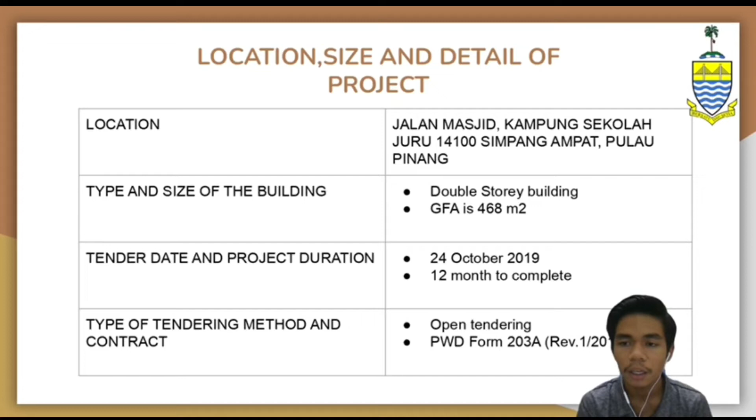For the case study, the client for this building is the Government of Penang, known as Kerajaan Negeri Pulau Pinang, the government authority for Pulau Pinang. The state government follows and is established by the Constitution of Malaysia, the Constitution of the State of Penang, and the Supreme Law of Malaysia. The government of Penang headquarters is in Georgetown, the state capital.

Their principle is to be ready and willing to help a friend in need regardless of religion, race, position, behavior, and physical condition. The government of Penang's responsibility is to build, develop, and maintain the state towards the desired direction that benefits its end users. The end users of the building are the students, teachers, management, and other workers of Kelas Kafa Masjid Kampung Sekolah Juru. The purpose for its end users, especially students, is to learn about Islamic knowledge, which was given priority by the government of Penang in elevating Islam as the official religion of our country.

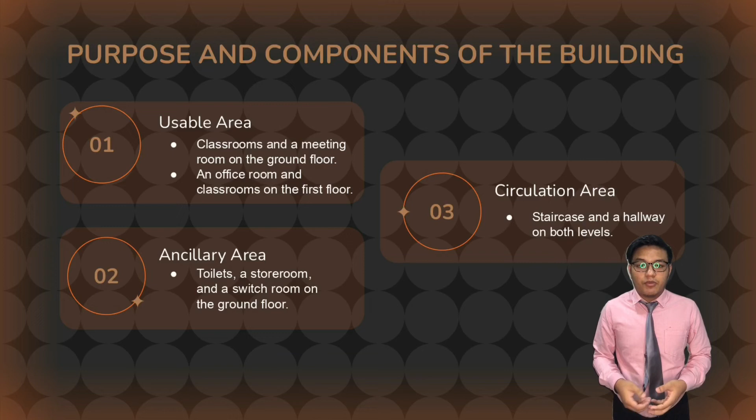For example, for usable area, this includes a classroom and a meeting room on the ground floor. Aside from that, usable area on the first floor consists of an office room and classrooms. For ancillary area, they only have toilets, a storeroom, and a switch room located on the ground floor of this school building. Meanwhile, the circulation area in this project only has a staircase and a hallway on both levels.

Next, I will explain about work breakdown structure, WBS. The purpose of WBS in construction management is to help the project manager run the construction activities as per the construction estimate. The WBS objective is to reduce the size and complexity of the huge project. By breaking it down into smaller pieces, work may be completed concurrently by several team members, improving team productivity and simplifying project administration.

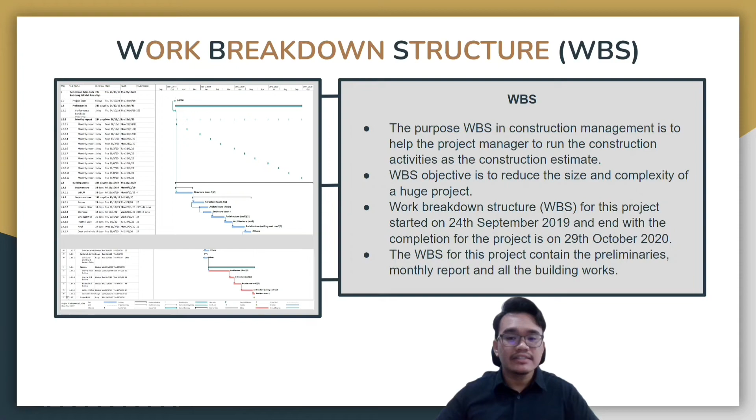The work breakdown structure for this project started on 24th September 2019 and ends with the completion of the project on 29th October 2020. The WBS for this project contains the preliminaries, monthly report, and all the building works. The preliminaries also include the performance bond and insurance for the whole project duration. For the building works, there are several elements recorded, which are substructure, superstructure, sanitary and services, and finishes. It took 237 days for the building works to be completed.

Now, let's move to how the duration was established. The duration was established by examining similar previous projects. Evaluating the duration of similar projects aids in calculating the predicted completion time. Forecasting construction duration allows the project owners to enable the contractor to finish the task within the period stipulated. The work schedule may also be analyzed to measure the quality of completed works and those that are presently in progress.

In our case study, the time required to complete the element work below lowest floor finishes WBLFF is 31 days, running from 25 October 2019 to 9 December 2019, done by structure team 1. WBLFF activity can begin once the performance bonds and insurance are issued. Next, structure team 2 can perform the element frame, which takes 21 days to complete after the completion of WBLFF works, performed from 10 December 2019 to 9 January 2020.

Finally, for the external wall element, the process takes 25 days to complete and will start from 30 January 2020 till 4 March 2020, after the staircase work is finished.

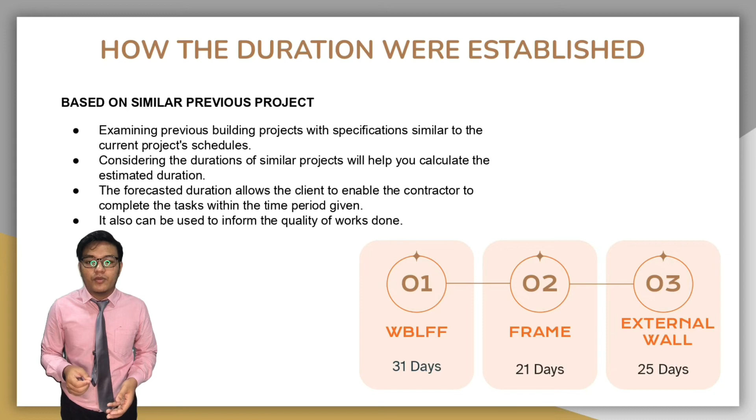Now we go to the critical and non-critical activities. For the work breakdown, the critical activities are the finishes work that consists of internal floor, internal wall finishes, external wall finishes, ceiling finishes, and staircase finishes. And for non-critical activities, it's like preliminary element, preliminary items, substructure, superstructure, and sanitary and services.

In this case study, the Gantt chart in Microsoft Project was chosen as our planning tool because it allows users to simply produce a work breakdown structure (WBS) and a cash flow for the project. Moreover, its interface is simple to use and comprehend since it displays the start and end times of each activity. It also helps us visualize the project in relation to the time range in which it must be completed.

It can operate project cash flow, and the data obtained from cash flow may develop an S-curve and a sawtooth. Additionally, it assists users in prioritizing tasks, defining the activities required for each, and assigning them to the appropriate team members. The S-curve for the project is plotted between cumulative amount against time, which is months, involving cumulative cost and

cumulative monies received 2 months delay. The cumulative cost was obtained from the cumulative cost of work executed from each month and combined all of it. Meanwhile, the cumulative monies received 2 months delay were obtained from a cumulative value less retention.

Based on the graph attached above, the cumulative monies received for the first 2 months of the project are delayed. This results in the contractor not having received any payment for the first 2 months to execute their project. Hence, the contractor has to spend their own money or from external funding for the work done, including materials

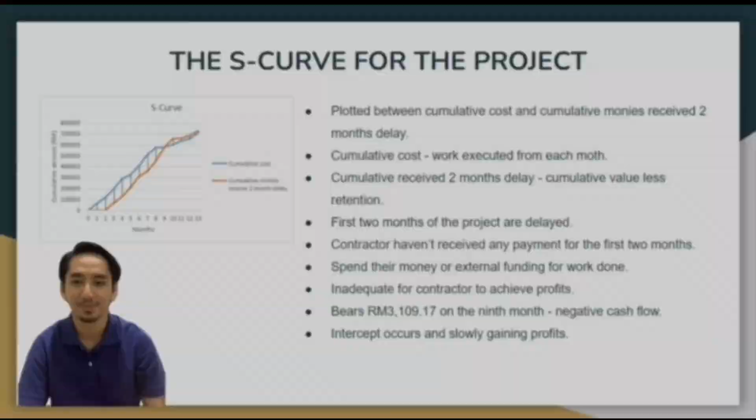The logic of the S-curve: it is one of the most widely utilized calculating techniques for project management in the construction industry. According to Meidiani Aprilliani in 2022, S-curve is a mathematical plotted graph that describes the whole or cumulative data obtained from a project.

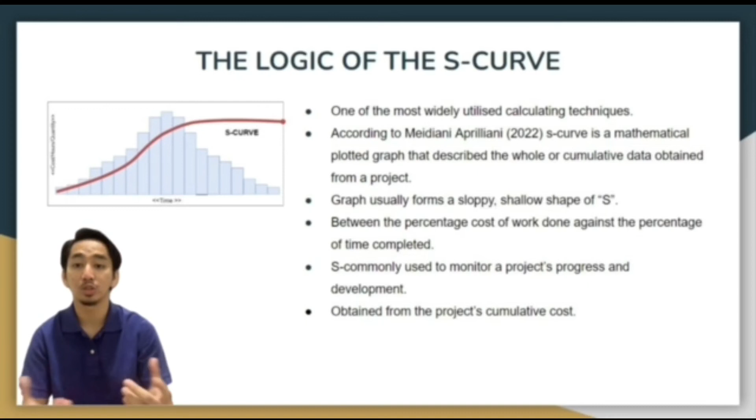It is frequently used to estimate the construction project cost to help with the timeline of the work and budget. The graph usually forms a sloped, shallow shape of S, which is the reason it was called the S-curve.

The plotted graph is between the percentage cost of work done against the percentage of time completed, which the chart shows the construction's positive or negative cash flow. An S-curve is commonly used to monitor a project's progress and development.

The cost of the project is obtained from the project's cumulative cost along the construction period, which consists of cost of supply of material on site, payment to labor and subcontractor.

The curve of cumulative cost often starts slow, as it is the period where team members are either conducting market research or just getting started with the initial execution phase, which might be delayed.

The growth increases quickly as more progress is done, which involves major costs to construct the work. Then the line will flatten back on the upper side of the graph because the construction reached the finish point where only finishing works and approvals are left.

Meanwhile, cumulative monies or tender price is obtained from the project's cumulative income received by the contractor along the construction period. However, if the payment towards the contractor is delayed, the cash flow will appear negative.

Based on the graph attached below, the cash flow remains negative until the 9th month. Then the intercept between the 2 lines can be seen where the contractor slowly gains his profit.

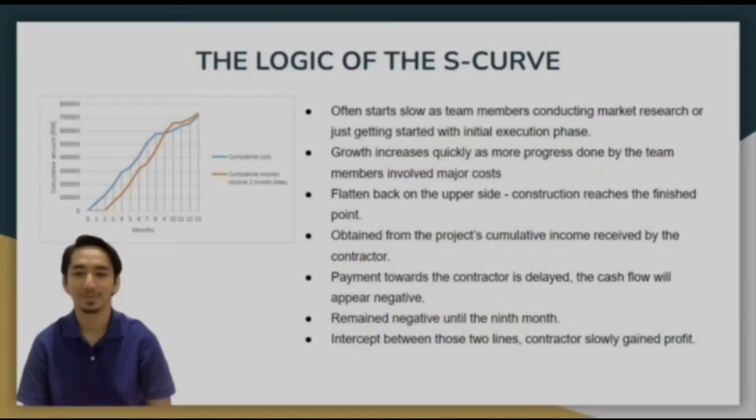Construction methods that influence the S-curve: firstly, technology advancement has given a great impact on the construction industry as it improves the quality of construction and the material used for the project.

According to Rhumbix 2021, one of the most famous upgrades due to technology advancement is the material used in construction, such as recycling material like lightweight concrete. It will impact the S-curve through time management and cost because the changes made are not from the original idea during forecasting. For example, a change in materials or concrete flooring will increase or decrease the cost and time management.

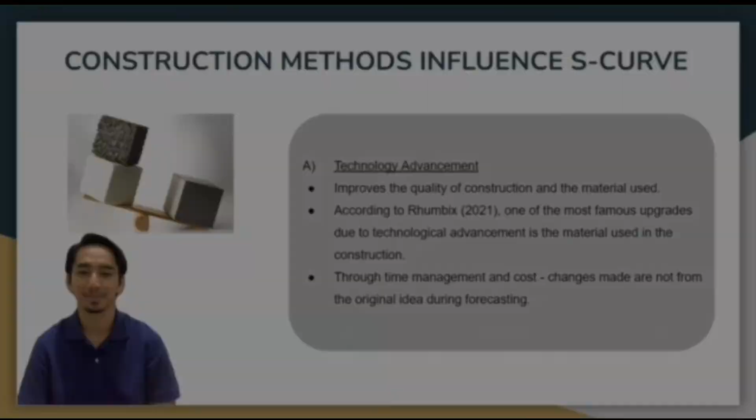Second is client requirement. As we all know, variation order is absolutely common in the construction industry. The client has the right to instruct regarding demand to switch the design or material used in the construction to the main contractor because they were the funder in the project.

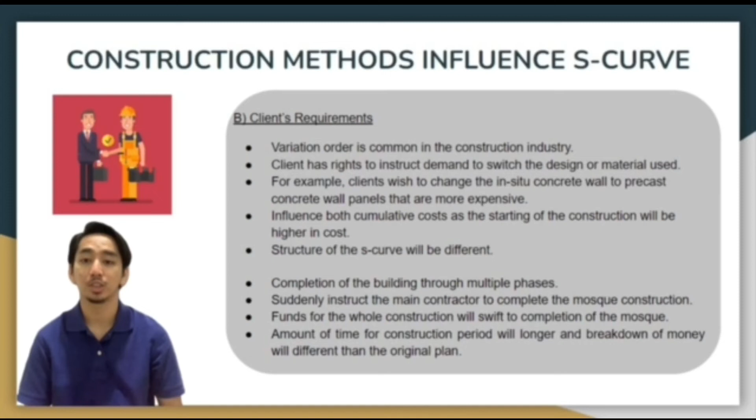For example, client wishes to change the in-situ concrete wall to a precast concrete wall panel that is more expensive. However, the construction period will be shortened due to the quick installation on the site. This will influence both cumulative costs, as the start of construction will be higher in cost due to orders made to the factory, and cumulative monies received to the S-curve.

Plus, the structure of the S-curve will be different from the regular shape seen, due to the completion of the building through multiple phases. Certain projects have various buildings with different functions such as mosque, multipurpose hall, quarters and ancillary building. The client could suddenly instruct the main contractor to complete the mosque construction with plans to use it quickly. Due to this, the fund for the whole construction will be swift to the completion of the mosque as a primary target. The construction period will be longer and the breakdown of money will be different than the original plan.

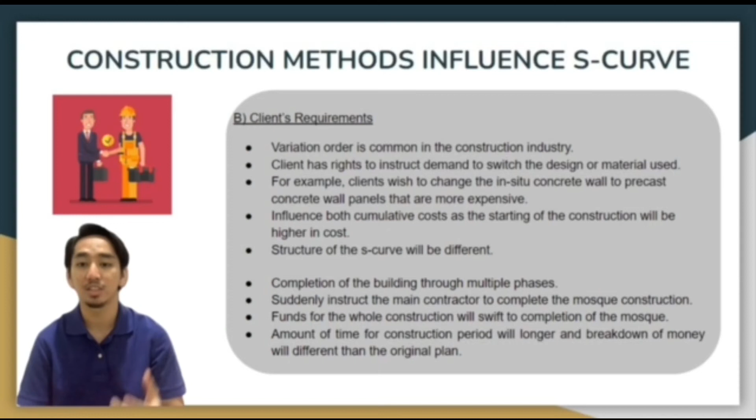Okay, right now we're going to talk about the sawtooth diagram of the project. Generally, the sawtooth diagram is basically a cash flow of a project, and according to Oxford University, it represents the income and expenses over some time interval. For our sawtooth diagram, it is plotted between cumulative money received and the month of the project.

The cash flow represents the cash flow of the contractor, and at the early month it will start with a negative amount of cash flow. The cash flow line will go down, and over the months the cash flow will rise up until it reaches the x-axis. When it reaches the x-axis it will be a break-even period, and afterwards when it starts to rise again, it will represent a profit. So that is basically a sawtooth.

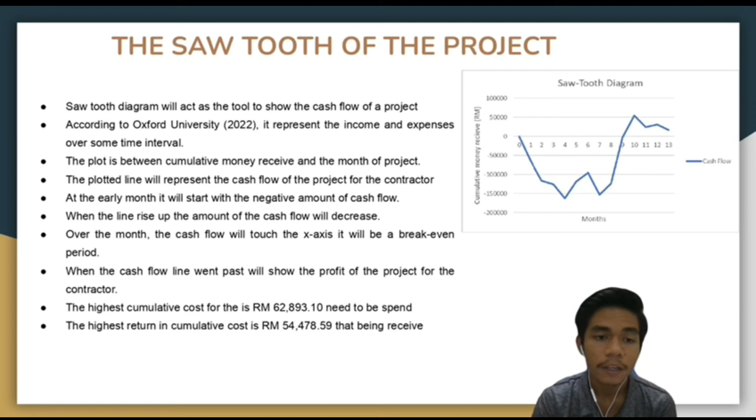So next, for the sawtooth of the project, the break-even period is when the contractor gets their return from their spending or investment, and referring to the CFI team, it refers to the revenue and total cost being equal. The break-even period is basically where the cash flow intersects with the x-axis, which is the month, and from the project it intersects at the 9th month. The amount of cash flow for the break-even period for our project is RM3,190.17.

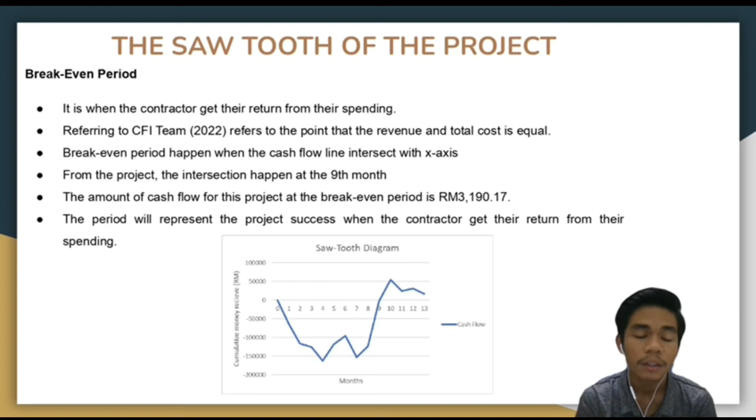The period will represent the project's success when the contractor gets their return from their spending. If the break-even point is later or longer, it will represent that the project has a problem or it will not be successful. So we proceed with the payback period.

So basically, the payback period is the period where the contractor invests or spends for the project using their money. According to the CFI team, it is the duration made to invest money for the project. The analysis for the payback period will determine the best way to shorten the payback period.

For the case study, the payback period for our project is from the first month to the 9th month. The payback period will stop when it reaches the break-even point. The amount of cash flow for the earliest month is 62,893 and 10 cent. If the payback period is longer, the project tends to be endangered. So that's all, thank you, and I will pass it to the next presenter.

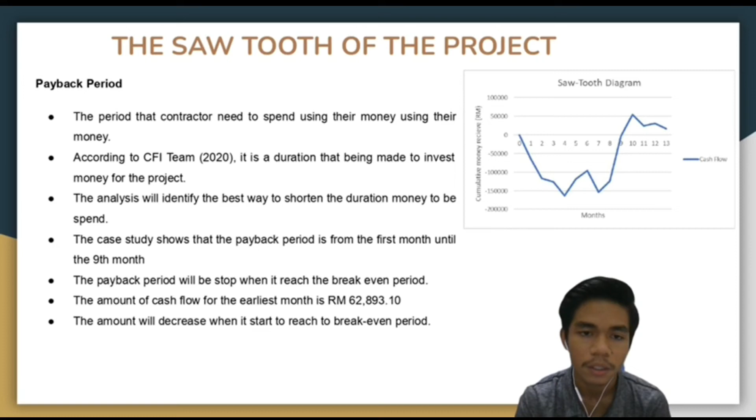Now I will proceed the presentation with financing required for the project. A contractor may ask for an advance payment on a construction project to help them cover a large startup or procurement cost that may need to be incurred before construction begins. For example, when they have to rent or buy expensive machinery, equipment, or material for the project.

Local banks are very appealing to owners since they are very familiar with the area and have the ability to assess projects. The finance area for this project started when the project commenced until the project's middle, 9 months of development. In the sawtooth diagram above, the finance area is located where the cash flow is below zero.

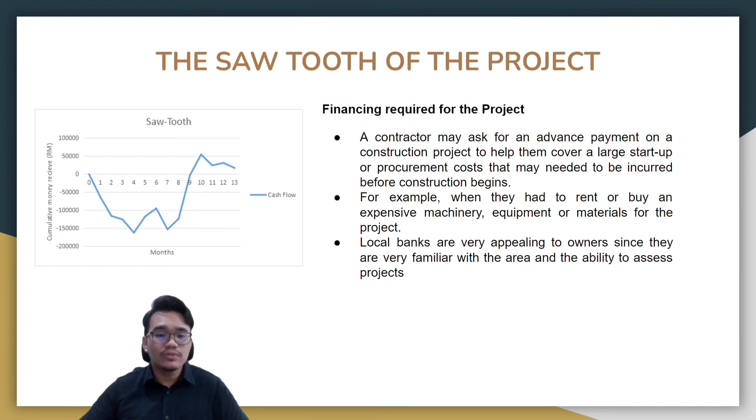Moving on to profit. From the graph attached above, the profit of the project is obtained from the cash flow table. Starting from the first month, the cash flow appears negative as the progress payment to the contractor has been delayed for 2 months. This can be seen as the negative cash flow in the first month due to the capital needed to proceed with the work based on the work program. It remained until the 9th month at RM3,109.70. However, positive cash flow starts from the 10th month until the construction period ends in the 13th month.

The profit that the contractor receives surely helps to cover the cost of external funding to purchase the materials and generate money for future projects.

To conclude, planning tools cover a few techniques and policies that were used to help the developer's team in planning management. Microsoft Project is used to aid them as it allows users to generate a WBS in Gantt chart form easily. This software is also user-friendly as it can handle both small and large projects.

The S-curve and sawtooth diagram can be used to determine cash flow projections. Since the duration of the project is usually reliant on the sequence of work areas, it's critical to provide a practical approach for determining the best solution that ensures the shortest project duration, allows the contractor to complete specific work as soon as possible, and adheres to a predetermined sequence of work area completion.

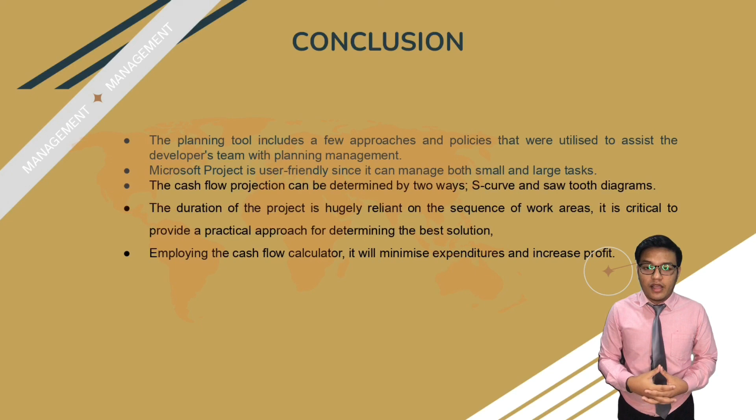When employing the cash flow calculator, it will minimize expenditures and increase profits. Alright, that's all from me. Thank you.